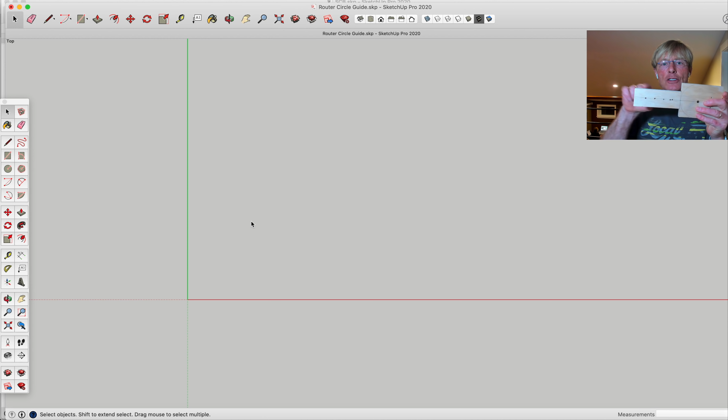What I want to do first is draw the base. It'll be a rectangle to start with, and I'll do the cutaways afterwards. So I want to go with the width, which I've measured. This base is a little different size than the fixed base, so I'm going with the width, same as this one, 112. Then I'll go with the length a little longer, 330, and this portion of the base will also be a bit longer because the base itself is longer.

So I'm going to start using the rectangle tool, which I can activate by tapping the R key. The rectangle tool is right here, and it's good to know these shortcuts. If you hover over any of these, it shows you the shortcut. Not all of them have shortcuts, but you can assign them if you find a tool you use more often. Hovering over the rectangle shows it's R, so I tap R, click in this corner, and draw out. It doesn't matter how far up and out I go. If I were doing a perfect square, it gives you an indicator to show a perfect square, so it aids you as you draw quickly.

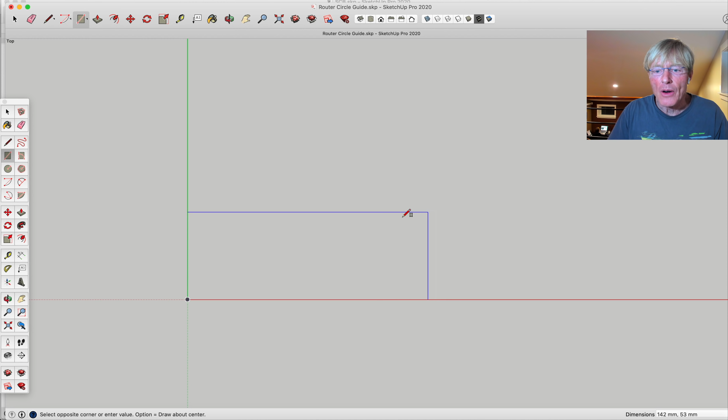This is going to take a lot longer because I'm talking my way through it. It really wouldn't take this long if I were just doing it. So I'm drawing this out, I've clicked once, I'm clicking the second time. I don't really care how big it is.

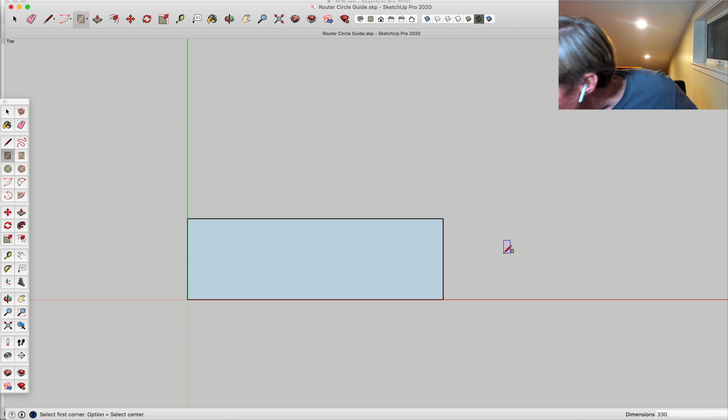If you look in the corner here, it shows I just drew 142 millimeters by 53. The longer dimension I know is 330, comma, then 112. I hit enter, and it automatically assumes millimeters because that's what I've set this up for. When I'm doing complete houses in SketchUp, or remodels, I use architectural settings, choosing feet and inches. In this case I'm choosing millimeter, though I could do centimeter.

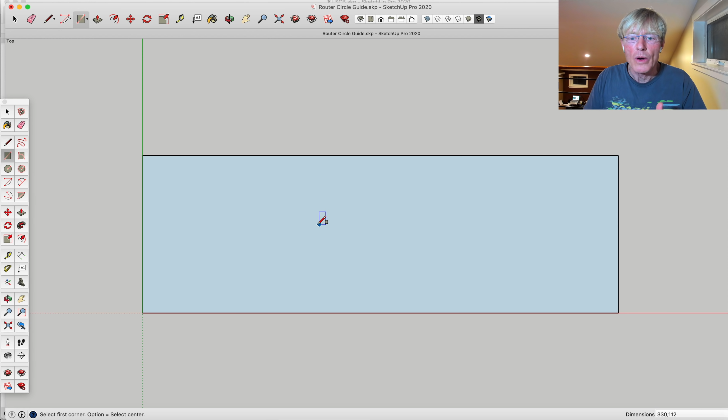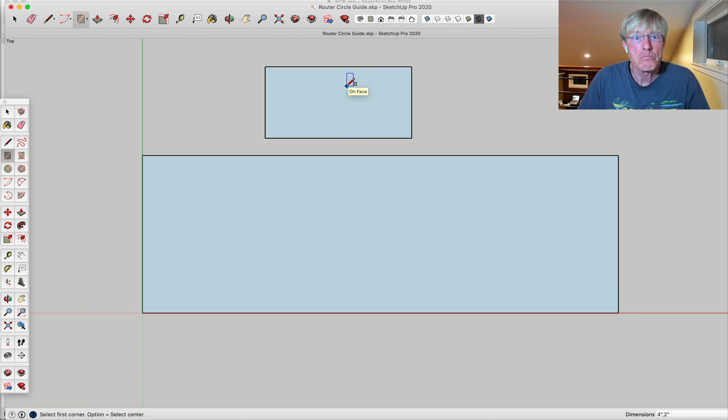But the neat thing about this, and I do all my woodworking now in this setup, is that I don't need to type in millimeter. I can still draw in standard or centimeter or whatever I want. If I wanted to do a rectangle that was 4 inches by 2 inches, I could type in 4 and the inch mark, comma, and 2 and the inch mark. You can look down in the right hand corner and see this, and hit enter, and that would give me a rectangle based on inches, even though I'm in the millimeter system.

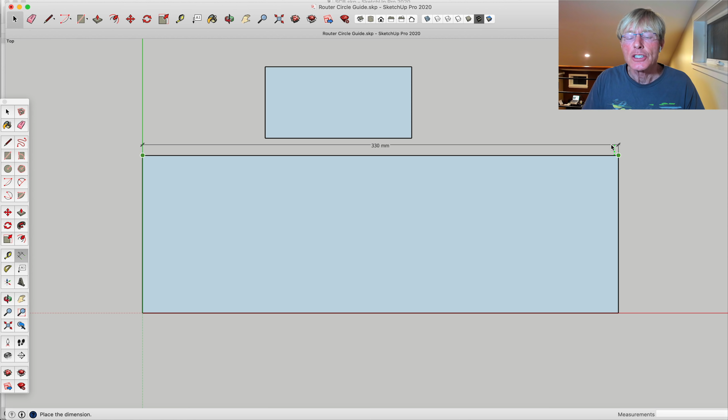So I can show you these dimensions. If I click on the D for the dimension tool, I can then show you these dimensions. Now if I hit D, I can click on one corner and go to the other, and that shows you that dimension. But I can also, in this case, just hover over the side I want to dimension, it turns blue, and I just drag it up. So that saves a little time.

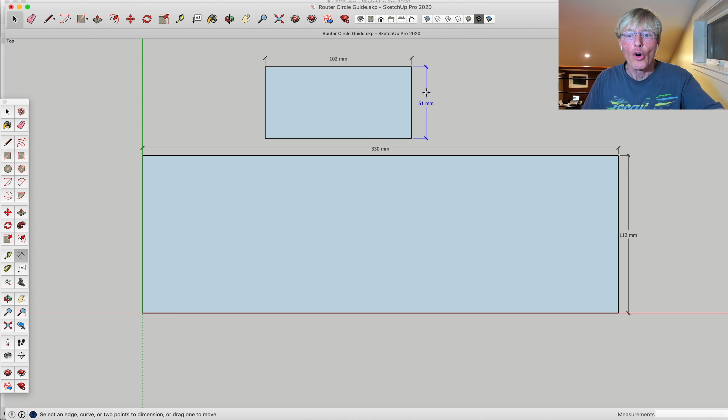So I can go here and here, and you see that it's 112 by 330, which is what I wanted. And this one, even though I drew it in standard dimensions, because it's defaulting to millimeter, it's gonna show me my dimensioning in millimeter. I would have to go in and switch over to standard or imperial for this to show inches.

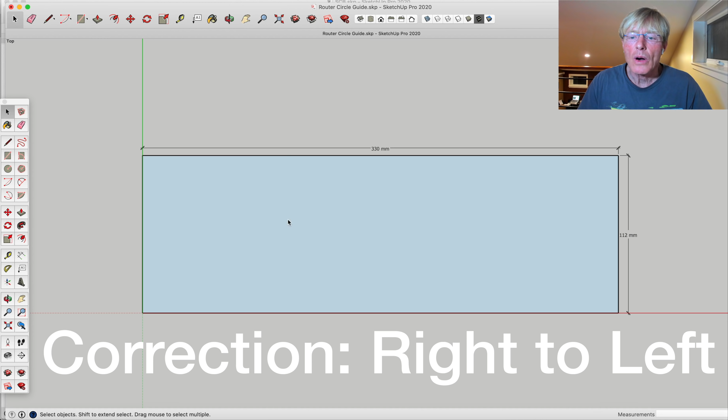So I don't need this rectangle, so I am going to draw right to left, and it'll select everything that the bounding box touched, and hit delete. Actually, I missed that one. Delete. All right, so I have the overall length and width, and I'm going to start milling this basically.

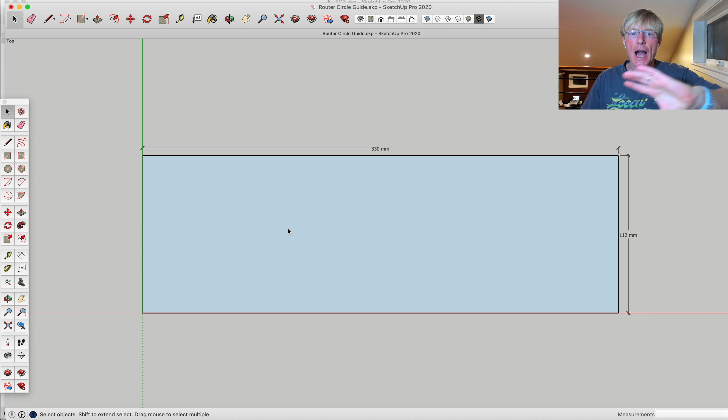Now, what I'm going to do is I'm going to treat this as the bottom. We're looking down from the top, bird's eye view straight down. I'm going to treat this as if it's the bottom, and then when I'm all done, I'm going to take it and actually go in and rotate it over, flip it over to the top. But most of the work is on the bottom, so this is a little easier.

And you can see that if I go to a view like this, I can start to see the 3D. There is no 3D now because it's still a flat plane, but you can see that when I change this, I'm not actually moving the model. I'm moving the camera. Big difference. So I'm not doing anything to the model here, I'm just rotating the camera around. Later on, when I want to turn this over, I'll show you how I will rotate the model or flip the model over in that camera space without moving the camera.

So I'm going to click back to this bird's eye view, and I want to, these two holes are exactly the same as on the plunge base as it is on the fixed base. And I like that it's a nice mounting point for this because I don't need to remove the sub base. It's actually these holes here, because the threaded holes are in the base and they've overcut holes in the sub base, so I can put screws right through and they'll go down and flush.

So I just found a couple of machine screws in my Smart Woodshop collection of hardware, and they fit perfectly. So with a screw gun or a screwdriver, in just a second I can attach this very quickly and easily. And again, fortunately, this one and the other one are exactly the same location. These happen to be off the leading edge 32 millimeters, and then they're 32 millimeters apart from the center. So I'm going to give myself some guides to draw to.